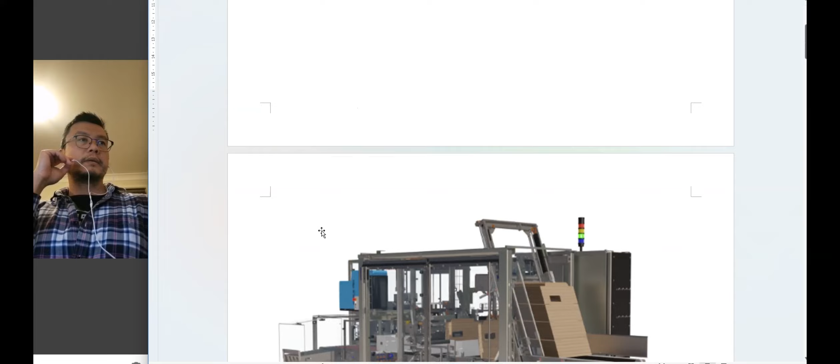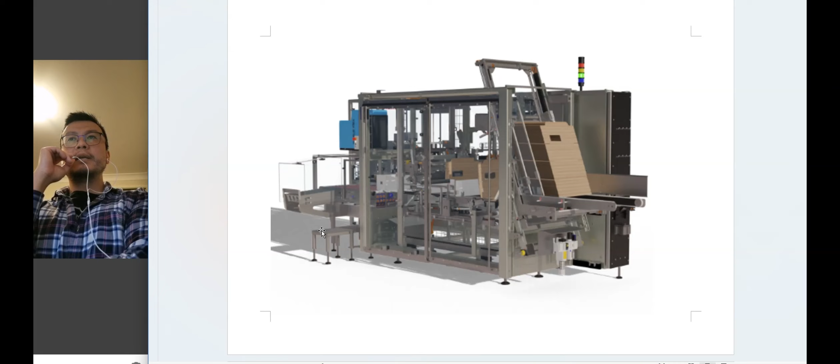If we started with a standalone case packer machine on the factory floor, the operator would need to set up the machine mechanically and programmably. The loose product and the cardboard would then be fed into the machine, which would perform its tasks within specified conditions. However, the machine might stop or break down due to various reasons, such as running out of cardboards, using soft or out-of-specification cardboard, incorrect machine setup, or a broken chain link.

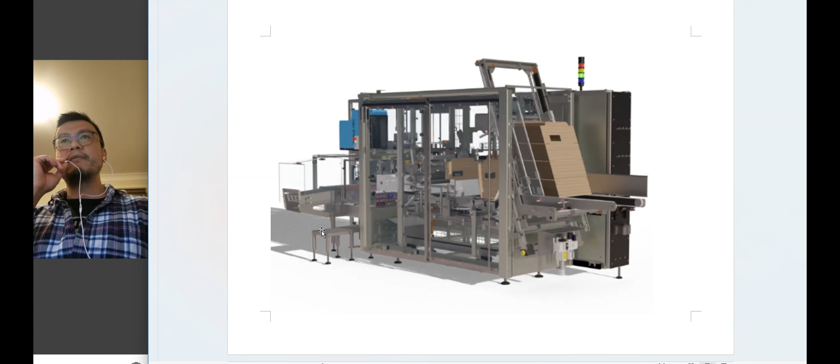Of course, newer machines now have more sensors and processors than ever before, aiming to reduce the workload on operators and minimize human errors. Let's take the product changeover setup as an example.

All the operator needs to do is select the right product from the recipe on the HMI. If the cardboard is too soft, an alarm like flap error or timeout error will appear for the operator to address. From that point of view, we refer to such a machine as a smart machine, but it still does not possess true intelligence.

Under what circumstances would we consider the machine intelligent? Remember when I mentioned the recipe? It is a collection of preset data for each type of container, specifying the different settings for each adjustable machine parameter. But what if there's a new type of bottle? Typically, the operator or programmer would manually create a new recipe to accommodate it. That's where intelligence begins to come into play. Intelligence includes the ability to learn, reason, generalize, and infer meaning.

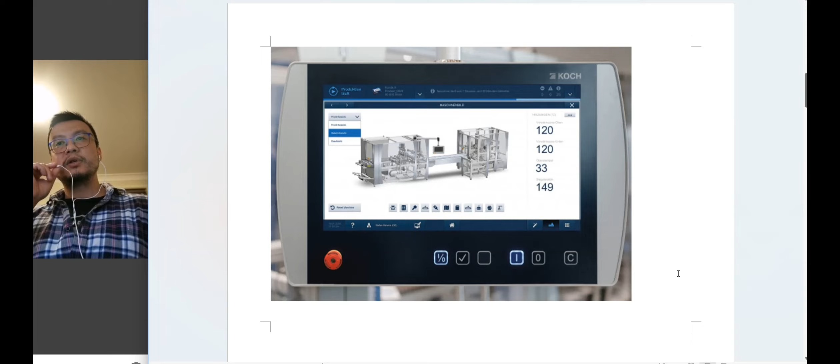The next level of intelligence would involve eliminating the need for hard data input. The machine can detect the geometry of the bottle and the cardboard, predict the packaging pattern on its own, and collect all data generated during production for monitoring and pre-warning purposes in case something goes wrong. This level of intelligence requires the packing machine to have machine learning, image processing, unstructured data analysis, and prediction abilities.

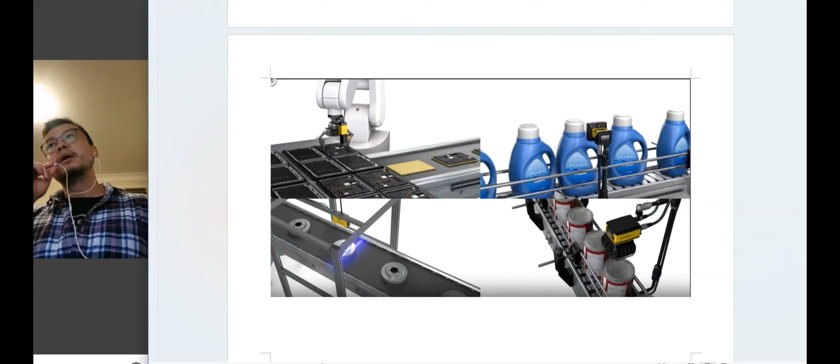If we zoom out and take a look at the whole production floor, AI has a broader area to play its role. First of all, it can detect performance issues.

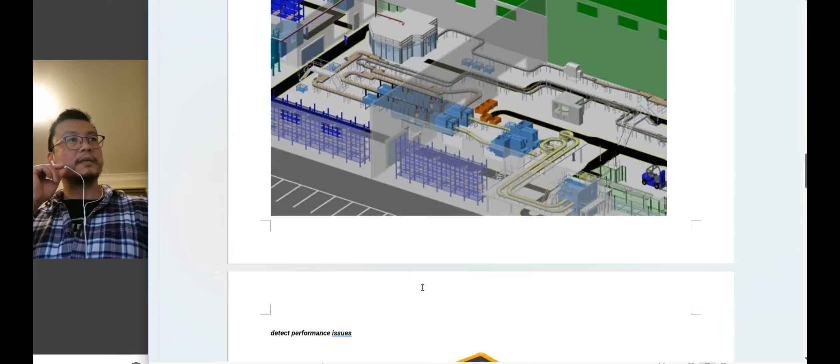Let's take Amazon's Monitron as an example. It can be attached to a critical machine like a motor surface. Once installed, the sensor starts to send vibration or temperature data to an AI service stored in AWS via Monitron Gateway. The AI starts machine learning based on each device's footprint. If any abnormality is found, the alarm will be sent through a registered mobile phone immediately. This enables maintenance personnel to carry out proactive maintenance to prevent unscheduled downtime.

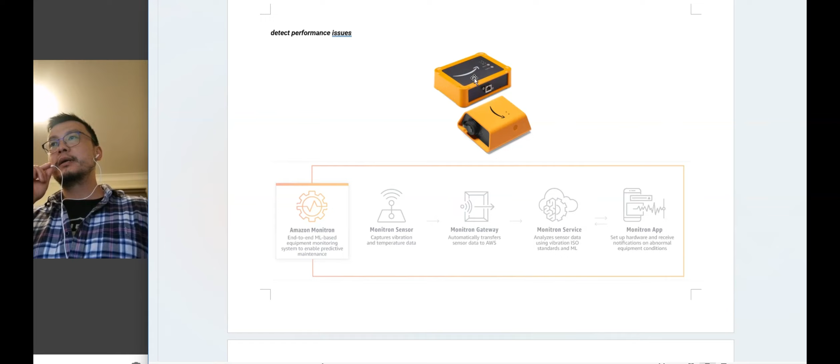Next is optimized processes. Think about a complex manufacturing facility with a lot of functional processes. The output of manufacturing is related to different combinations of data, such as raw materials, moisture, hardness, pH value, purity, operators, etc. AI can be used to process historical data to give the most optimized process planning. A typical example is IBM's Cognitive Plant Advisor.

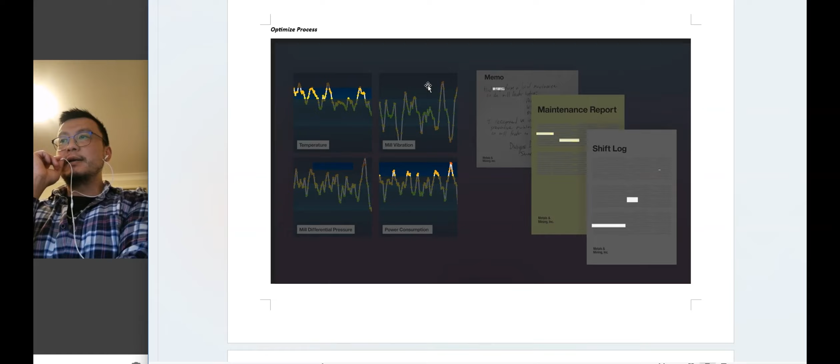Okay, next, make smart decisions. Once a complex system fails, a traditional SCADA or HMI only tells the operator the symptom, which leaves the problem for the operator or maintenance to address. In some cases, when the symptom happens, it's already too late for the operator to trace the original cause because it happened in the previous process.

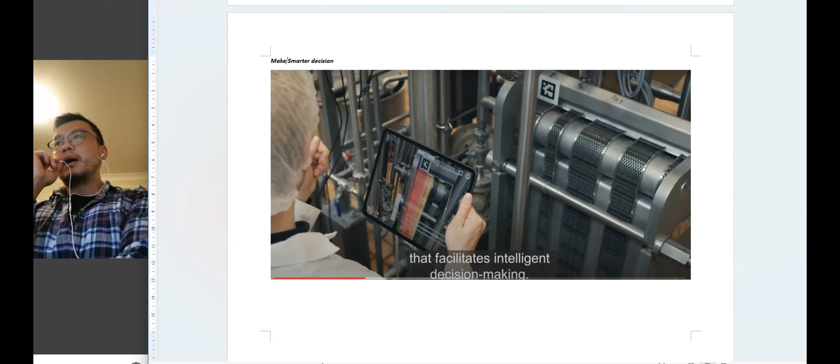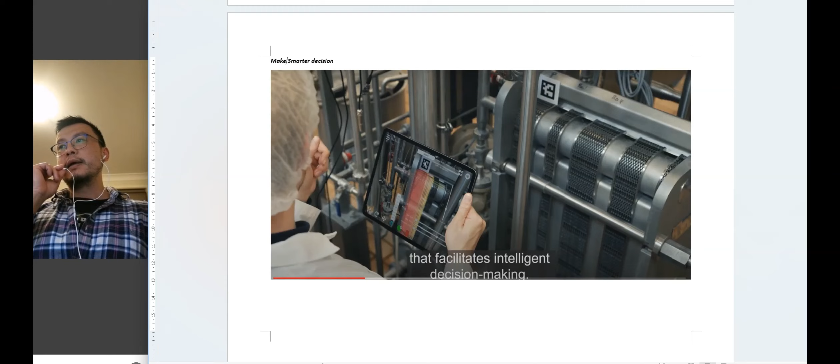However, the modern AI-powered system can keep an eye on every real-time data point and compare it to proposed data. Based on training information, it will throw out an alarm to the operator more accurately related to the problem. This picture displays a digital twin system developed by Force Technologies, showing a more interactive interface to the operator to display useful information via tablet.

Certainly, the application of AI in manufacturing doesn't end there. When we consider manufacturing from a broader enterprise perspective, there is immense potential to leverage AI.

Let's consider a simple example. If AI is employed to analyze sales data, it can provide more accurate sales forecasts for the near future, thanks to its ability to process vast quantities of data simultaneously, far beyond what a human can achieve. Based on these forecasts, procurement and manufacturing plans can be seamlessly generated to align with sales objectives while taking into account the current production capacity.

By harnessing AI in this way, manufacturing companies can optimize their operations, minimize inventory cost, and ensure a smoother alignment between supply and demand. The ability of AI systems to quickly analyze and interpret vast amounts of data empowers decision makers to make informed choices that enhance productivity, efficiency, and profitability.

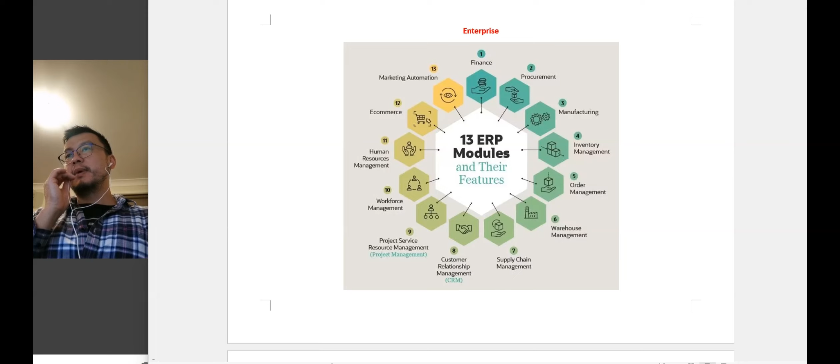Furthermore, AI can be employed to automate various tasks and processes within the manufacturing environment. For instance, AI-powered robots can be utilized for assembly, quality control, and logistics, thereby increasing production speed, improving product quality, and reducing errors. Machine learning algorithms can also be applied to detect anomalies and predict maintenance requirements, enabling proactive maintenance and minimizing unplanned downtime.

So far, I only briefly covered the aspects of AI used in manufacturing. In the next episode, I will keep on discussing AI.